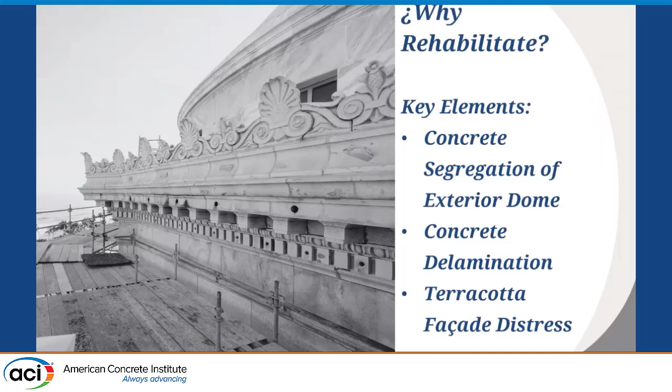So here's the dome exterior. Now, if you look at the dome, the bottom part is where the terracotta facade sits. It's a small portion of the entire facade, but it's a very prominent one. It extends in an overhang around the periphery of the dome itself, and then you have the dome structure, which on top of the dome rests the lantern of the legislature.

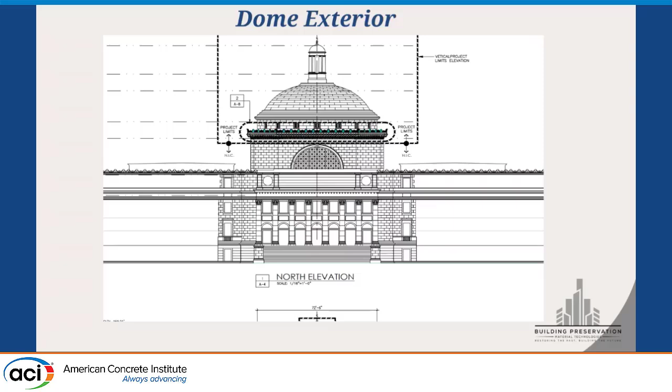If you look at a cross section of the interior, you're going to notice something you don't see on the outside. In reality, there are two domes: an exterior concrete dome, a space within it, and a bottom interior dome.

If you ever walk into that structure and see the beautiful paintings on top, they're hung from that second level. You're not seeing the inside of the exterior dome. When water would come in, it would infiltrate and eventually trickle down, potentially hitting the paintings. Restoring those paintings was another separate job.

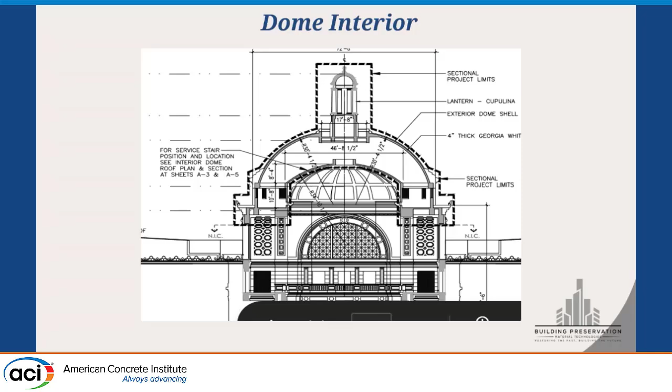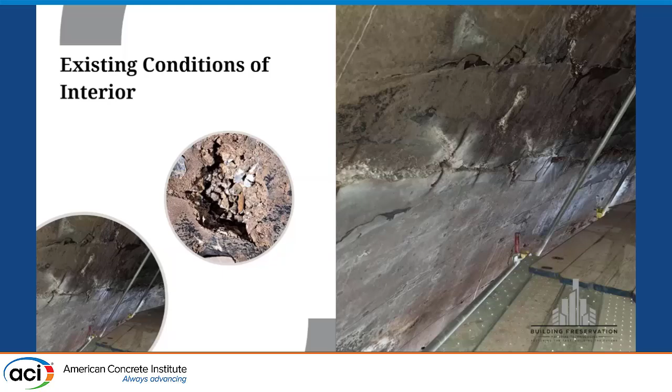When you walked into that small space, here are some of the issues you would see. If you look at the dome from the interior, you'd see a large amount of segregation and voided spaces, ample cracking, a lot of spalling, and not that much corrosion on the outside. This is an example of some exposed rebar. Look at it—the rebar isn't in that bad a shape on the dome. We'll see in other elements of the structure it was in pretty bad shape. But the dome's issue wasn't corrosion, it was more the voided spaces. It was pretty much a crackerjack.

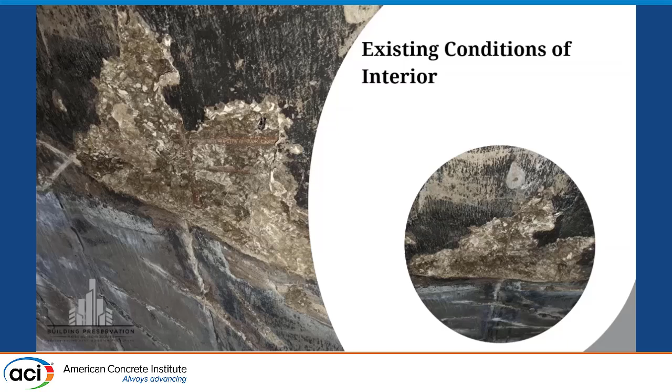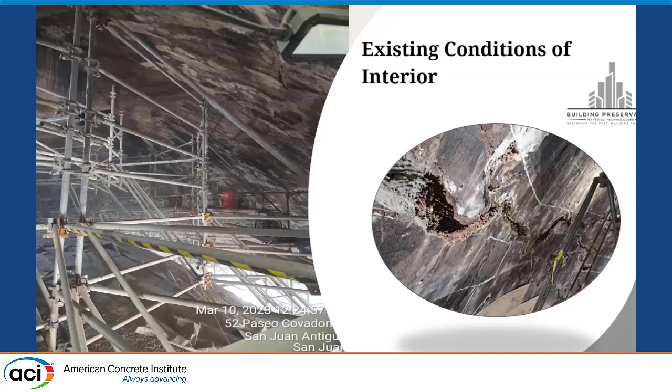As you went along, you would see ample evidence of cracks. In reality, these cracks were more spalls—there was internal delamination. When we started removing them, we found we didn't really have a crack to inject with epoxy, it was in reality spalls. One of the photographs here shows us following that delamination around.

This is the top of that dome, and these are the beams, the main girders where the lantern rests. If you look closely, you'll see a lot of aggregate and very little cement paste—that was one of the issues. Another interesting issue is that you also see iron angles that were used as part of the reinforcement system, aside from rebar.

Anecdotally, it's mentioned that these iron angles came from the railway industry 100 years back, when Puerto Rico had rails.

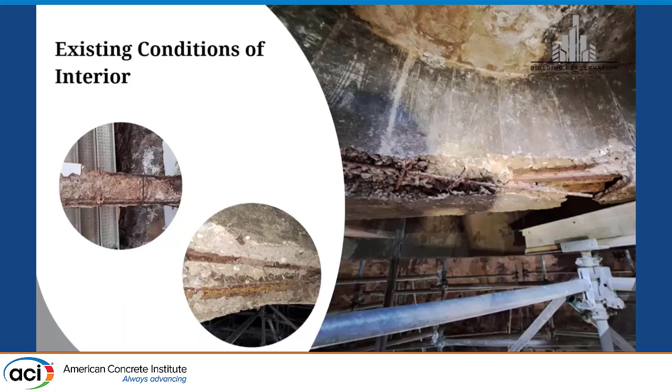In these photographs, you're going to see a little bit closer. You'll see the lack of cement paste in the photograph on the left. On the right, you see the condition of the stirrups. In many cases, you'd lost total cross-sectional area of the stirrups, so you had no shear capacity other than the concrete.

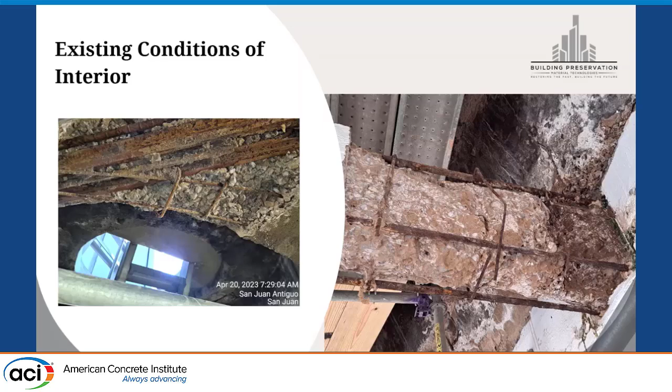So how do we go about fixing this? Initially, the plans called for micro cement injection with 16-inch on-center ports, vertically and horizontally, for the entire dome. You might think that's straightforward—inject one port, see counterflow on the next, switch that port off, and keep moving across the area. The reality, as we'll see, is that's not the way it worked.

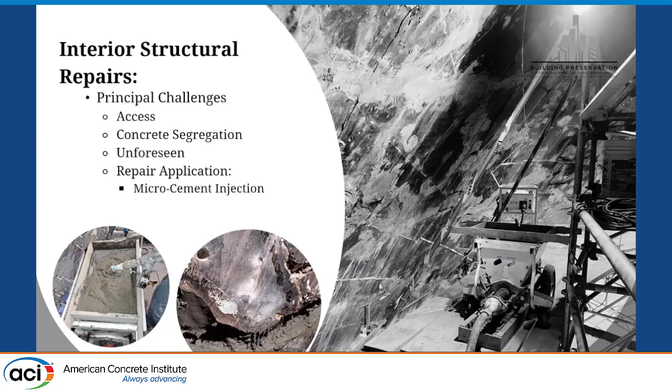There were many unforeseens, including concrete segregation, but in the end the main driver of the repair was micro cement injection. We used a rotor stator pump with low pressure, under 30 psi, and ended up filling about 8% of the total volume of the cupola itself. The material we used was MasterRoc 900 SR by Master Builders.

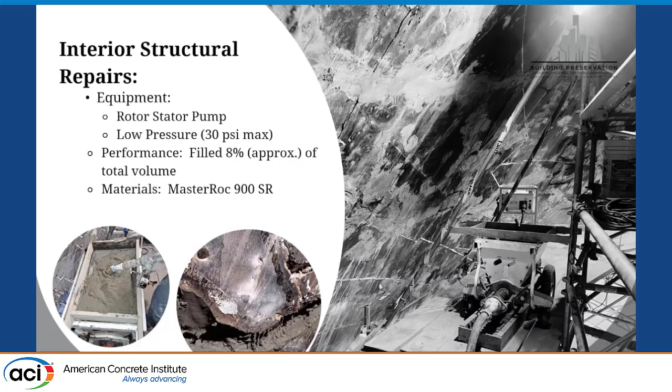Here comes when we start doing the work. When we start injecting, we notice parts of the structure, parts of the concrete, starting to spall off—because they were completely loose from the beginning. So you can't just inject and be done with it. We had to rearrange our methodology, first identifying all the loose spalls, removing them, and doing a standard concrete repair with 90-degree angles, installing mortars, a competent repair mortar.

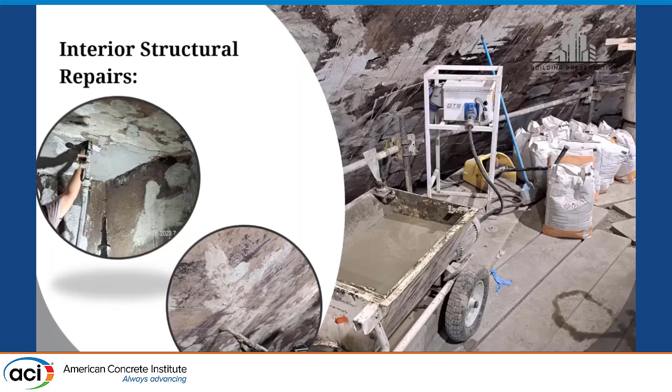Once that was done, we could come in and safely inject the entire dome. But when we started injecting, here come the additional problems. We started getting micro cement trickling down on the sides of the dome itself. We had to place people on the outside to do observations while we were injecting, because this happened in multiple places around the windowsills, in the middle of joints, in the middle of the height of the dome itself. That added an additional element of despair to our work. Obviously Pepe, who's smiling now, when we would go to those meetings, he wasn't smiling too much.

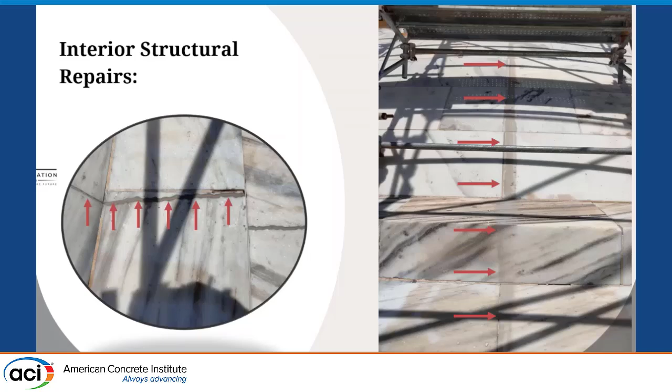Once that was finished, we tended to the girders that support the lantern on top. You had seen in the beginning the photographs of the girders themselves, with very low cement paste. So it wasn't just an issue of coming in and repairing the concrete, cleaning out all the corrosion, integrating corrosion inhibitors, and putting in a repair mortar. You had serious issues with the fact that you had very little cement paste. So you could repair one portion and possibly not see other places in that beam with the exact same problem. And in the future, when it starts filtrating water again, it's going to trickle down and re-corrode the areas.

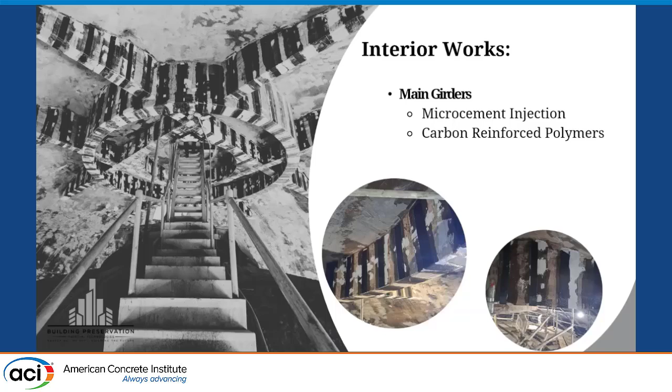So Pepe and I sat down and decided on a system where we also did microcement injection into all of those beams, just as we had done with the cupola. To finish it off, since we had so much issue with the cross-sectional area of the rebar, we added additional shear reinforcement with carbon fiber laminates, just to compensate for that loss of reinforcement. So that's more the concrete repair portion.

Here comes the terracotta facades. The terracotta facades for me were probably the biggest challenge. Let's understand where this building sits. It sits right in front of the coastline. It'd be a perfect boutique hotel, if it weren't the legislature. Who knows, it might be better being a boutique hotel than the legislature.

So we have a tropical environment, high winds, saltwater spray hitting constantly. And let's add to the fact that in Puerto Rico, maintenance is an issue. As opposed to when you have to go change the oil in your car, typically they don't maintain their structures. So we had to deal with all these issues.

And when we got close to the terracotta facades, we saw what was really happening. We were getting portions of those terracottas falling off. And when you looked inside, you could see that the supports were all corroded. In addition, the entire facade, which is terracotta, is supposed to be voided—it's not supposed to be filled with concrete. Because the way it works is, if water goes in there, it trickles down and drains.

This terracotta facade had portions filled with grout, and other portions not filled with grout. Some of the joints were cementitious, and some joints had been repaired with elastomerics, not permitting the water to come out. So in the end, what you had was a very hybrid structural system, whose behavior was completely heterogeneous.

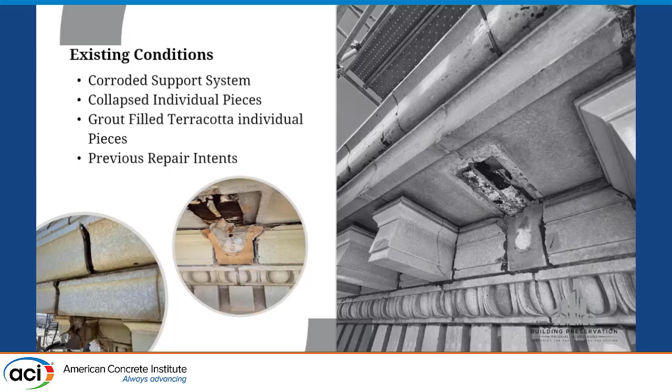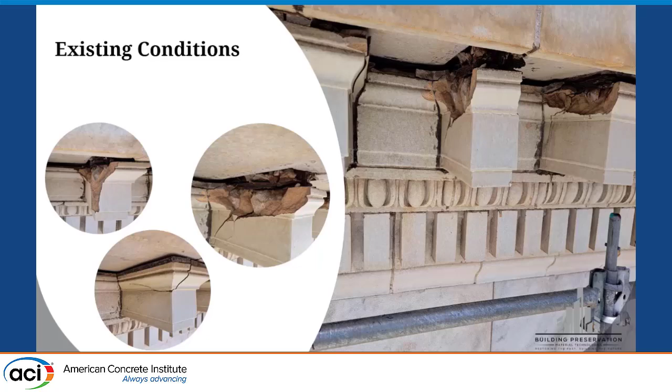These are some of the existing conditions. As we walked around the site, one constant was this cracking and rust jacking, where we would see exposed angles, which were in reality the support system of the terracotta facades. When you look at the difference in colors, those were repair attempts from previous times, and when we got close, we saw that the joints had been covered with an elastomeric, which is a complete no-no when it comes to terracotta restoration.

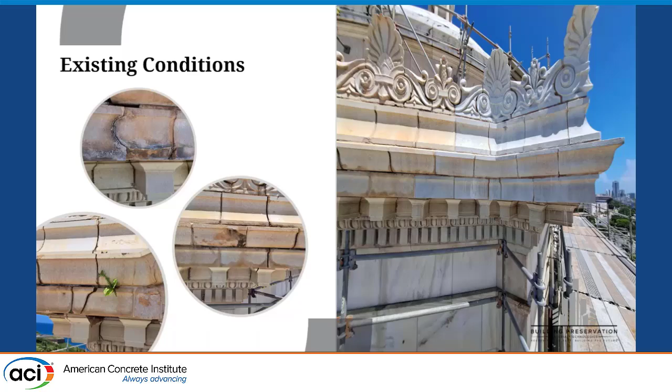Once we opened up some of the areas that were so severely damaged that they needed to get removed, this is what we saw. We had a topping that had a mixture of clay brick with a cementitious topping. We had what they called in the plans a klinker, which was really a cementitious mixture with carbon. Then we had the concrete slab, and then you could see the angles that extended outward, and that served as the main support system for the terracotta facades.

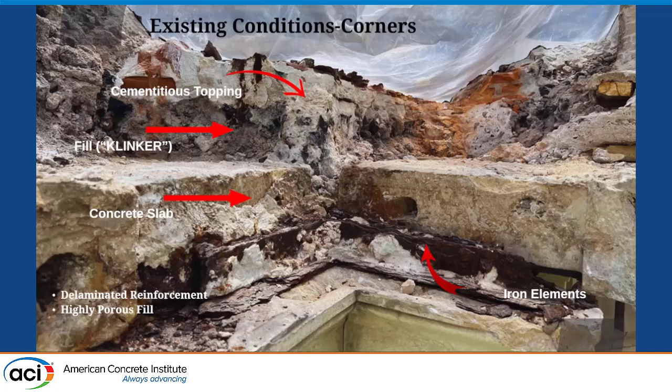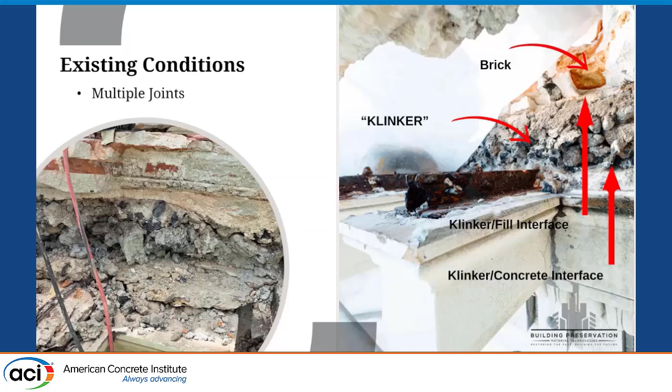So talk about heterogeneous. All these materials have none of the same engineering properties. They're completely different. How do you estimate and predict behavior when you have such a heterogeneous situation in your hands? You have multiple joints causing issues, multiple locations where there's water ingress, corrosion and rust jacking, and the terracottas. So how do you deal with this?

How do you deal with such a complex situation? The initial project called for specific repairs in different portions of the facade. The reality was that once we got up there, we saw that the entire support system of the facades was in bad shape. I used the term imminent failure, and I meant it when I spoke to the government. They got upset at me because they said you could never say that word in front of the press. But that was the reality of what we were looking at.

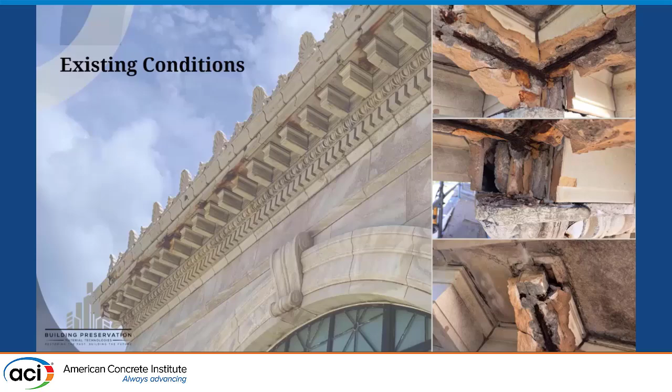We had two options: either figure out a way where we can reinforce the entire thing without having to remove it, or remove it and redo the entire structure, which would have cost millions and millions of dollars more than it actually did.

So before we get into the engineering portion of how we did it, let's think a little bit about the load path, and how this structure was supported. We had angles at the level of the terracottas that were spaced at 18 inches, and they cantilevered out, and that's what supported the entire facade. You had a concrete fill behind it to serve as a counterweight, and this is actually a photograph of the plans, showing reinforcement inside the terracottas themselves.

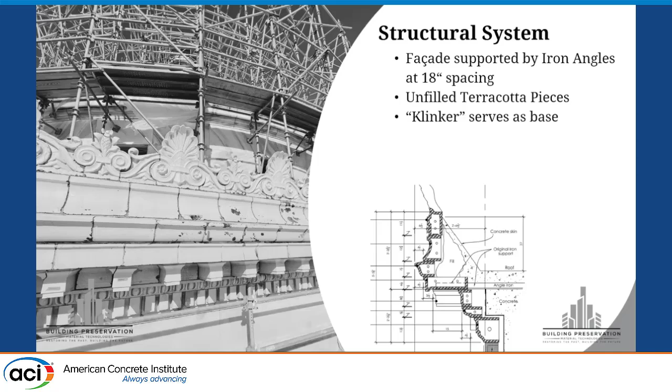That never happened. When we started removing some of those terracottas, they didn't have any reinforcement on the inside. They were literally just sitting there with grout between them, built up, and it's a miracle that they hadn't fallen off with high winds or some of the movements that we get in Puerto Rico.

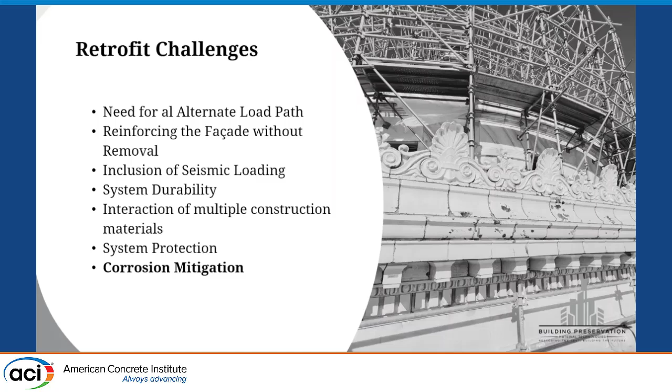So we knew we needed an alternate load path to reinforce this, and we knew we had to figure out a way to not remove the entire facade. The specifications called for considering seismic loads when doing the repair, to add a little bit of salt into the mix. We needed to think about system durability, the interaction of the multiple construction materials, and very importantly, corrosion mitigation in the end. So we came up with a system from Canada called the Cintec anchoring system.

The way the Cintec anchoring system works is you insert anchors into discrete portions of the structure, and you anchor the structure in place without having to remove the structure. In the corners, where Cintec couldn't be used, we used a standard system with stainless steel angles to support the entire structure.

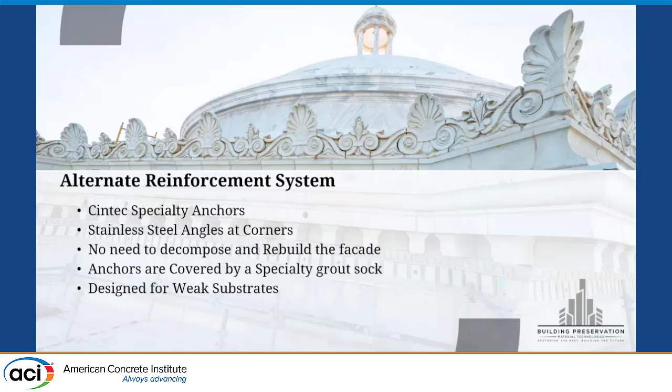One of the particular things of the Cintec system is that it's an anchor that has a portion with a grout sock. That grout sock gets inflated, presses upon the surfaces of the sides of the substrate, and that's how it makes the mechanical bond. It's perfect for weak substrates like this one.

This is a sample of what we're talking about. On the left, you'll see one of these anchors. In reality, it's either a bar or an HSS stainless steel tube, with a portion specifically designed for your substrate, for your particular situation, where you're going to inflate that grout sock with grout to perform the mechanical anchorage. And on the other side, you'll see the grout sock inside a substrate, where it molds itself around whatever is around it to make that bond to the structure itself.

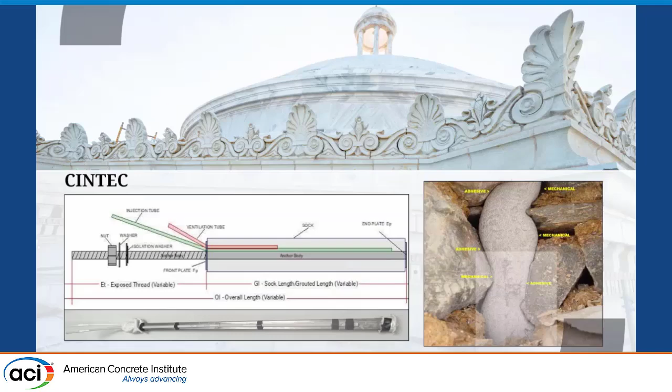So in the end, the final design had to consider not only the vertical loading, but also seismic loading as per the IBC 2018, which is the code that the Puerto Rico Building Code defers to in regards to seismic issues.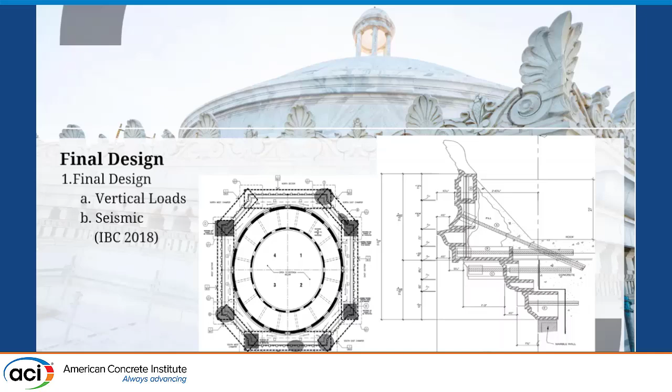We ended up having to reinforce the entire periphery of the structure. If you see on the sketch on the right, we have multiple levels of anchoring: three levels of horizontal anchors that would stick out, and one at 45 degrees to help with overturning of the pieces. So actually three levels of anchoring plus the 45 degree. We also added vertical anchors in very specific places to help consolidate the structure and help it act as one as much as possible.

On the corners, as we had discussed, we ended up using a system of stainless steel angles to sit all the new terracotta pieces on top, because the Cintec system was very difficult to get working at angles in those corners.

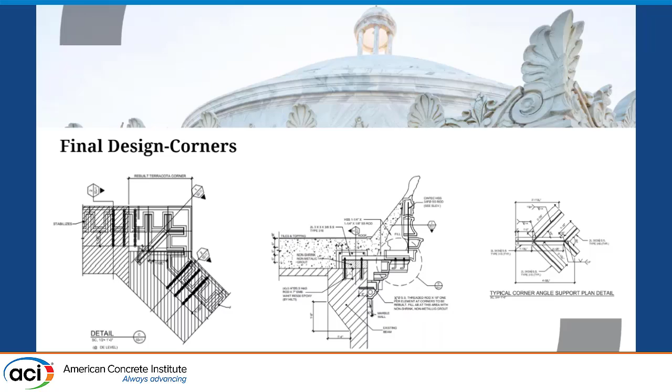So in comes execution of the work. As with the dome itself, here we need to understand the level of sensitivity this project has. The reality is most of the structure was being supported by corroded angles that with a flick of a finger you could break. So the structure in itself throughout time had probably redistributed its forces to maintain equilibrium.

We had to be mindful of this when we did the work. Initially we had to shore a portion of the structure before starting, and we would remove the modillions, one of the terracotta pieces you see in the second photograph. We would cut it at the base to expose the iron angle behind it, then remove that angle so it would not cause additional rust jacking, install the Cintec anchors, reinstall the modillions, and then resurface the terracotta facade.

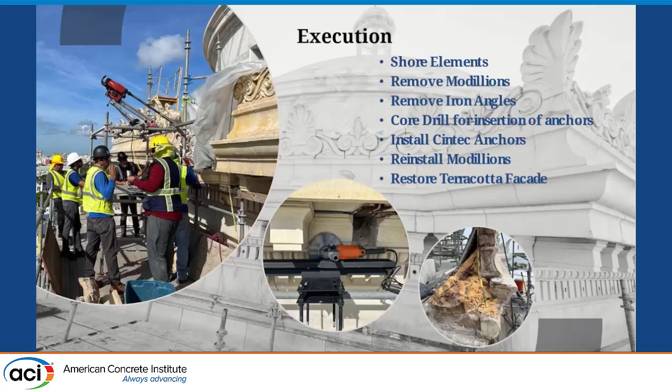This is some of the work being done. We drilled at multiple levels, and what you see to the right are the anchors themselves, and those tubes are where you fill with grout. So you would install multiple anchors first, and then come back and grout them in.

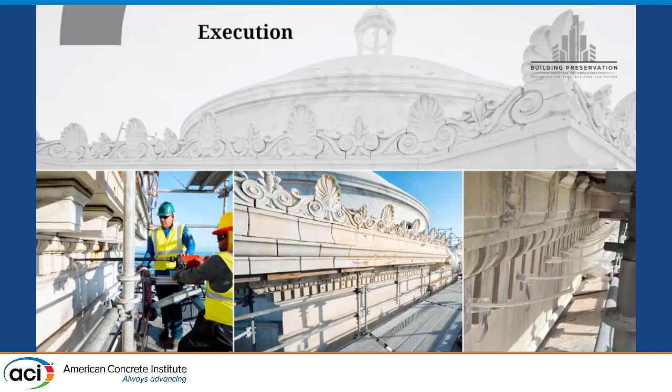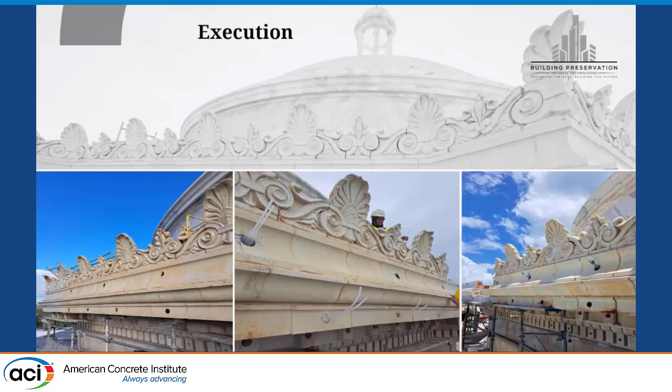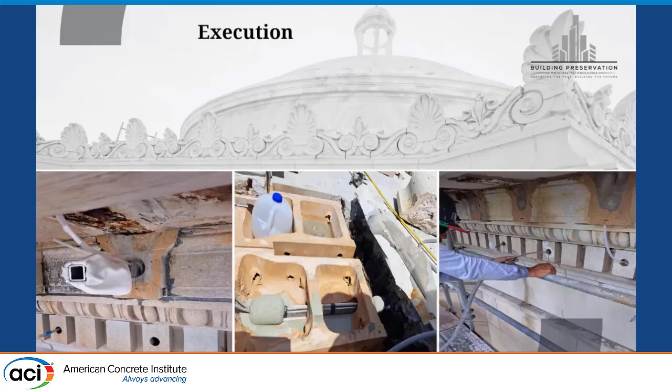These are some of the works we did on the corners, where we had to extend the stainless steel angles and anchor them in, creating a reaction beam behind it so they would be well supported.

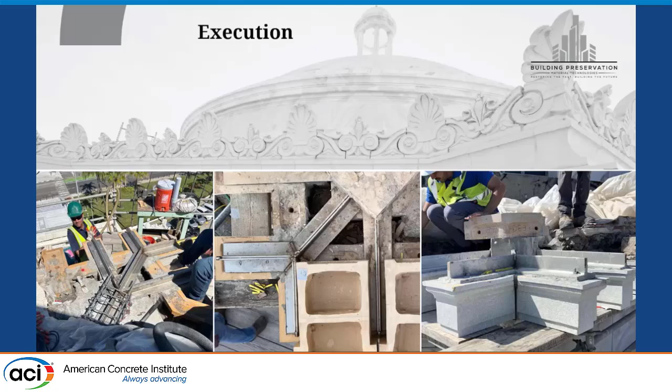And in the end, what did we learn? First, with regards to the terracotta facade, the major problem was the rust jacking. There wasn't an adequate support system for it. There was a lack of competent waterproofing, and I didn't discuss it, but that was a big portion of the job to make sure water would not come back into this place. The Cintec anchors were the reason we didn't have to completely remove the terracotta facade and redo it.

With regards to the dome, the microcement injection restored the integrity of the entire dome. Like I said, it was literally like a cracker jack before it was re-injected. It's going to protect against future water ingress, and the carbon fiber has helped enhance not only ductility but also compensate for that loss of cross-sectional area. So in the end, I'd just like to leave you with this.

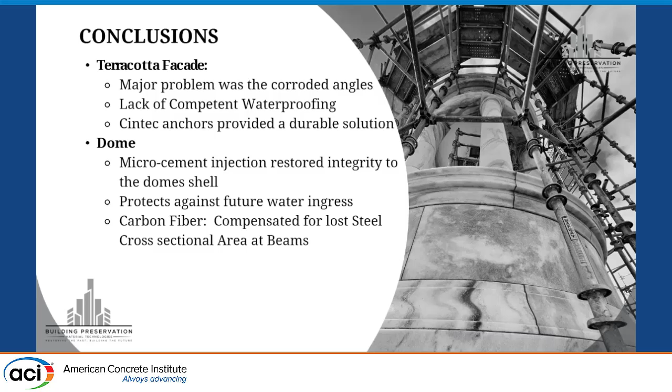Thank you, Ramon, for being such a great mentor to all of us. You're a legend to us, and you will be remembered for the remainder of our professional lives. Thank you.